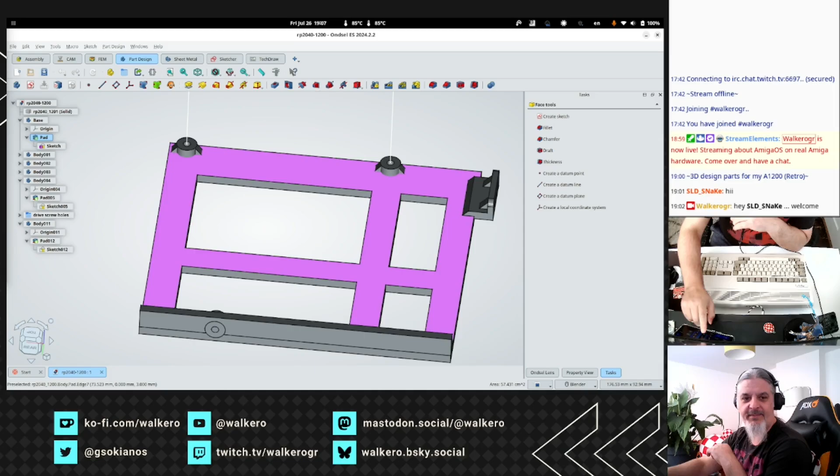It's Friday and today we are going to have a look at a few things. It's a quite different stream than the previous ones I did. We are not going to mess at all with PyStorm or things like that, but as you can see on your screen, I'm going to do a little bit of 3D stuff.

I'm going to explain what we are going to work on today. I don't know if you remember this, this is my old 1200 with the Blizzard 1230 in it, with a lot of stuff laying around inside the case, and we are going to work on a few things. So I will show you what the goal is and what I want to create today, and with your help and your company we will start doing stuff.

So before I start, how are you doing guys? How was your week? Everything good from your side?

So I'm going to open the case. It is already not screwed, and let's see what we have here.

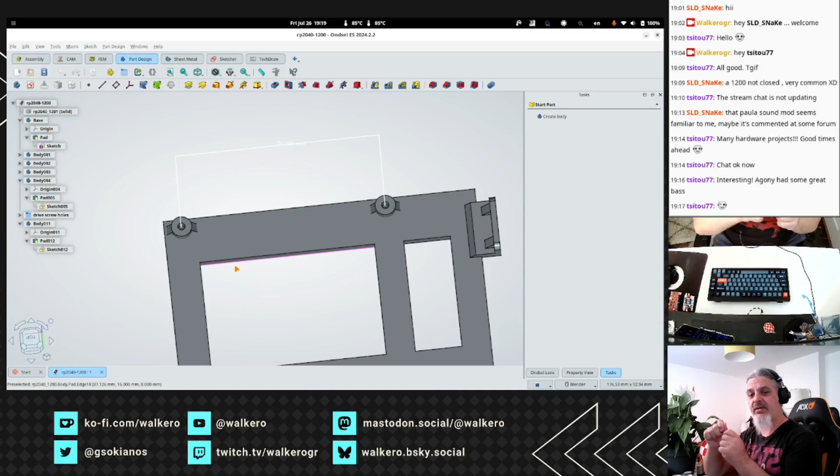This application is free of charge, and I'm using that. I started using it last week, so I'm not an expert. I started building something here, as you can see, which is a base. These holes here, I'm hoping, are going to align with the drive holes where you screw the drive onto the case at the back.

So I hope these are going to be there, and this is going to be in the place where you have the drive button, and that side is going to be closer to the Blizzard. So I hope to have here a hole that you can use with the extra stand that the drive has, and screw that stand onto the base.

So what I need to do here is create similar stands for putting down the RP2040, this SCSI board. It has only two places where you can put your two screws, but I don't think it needs any more. The idea is that this is going to be facing from this side, so from this side we are going to have the SD.

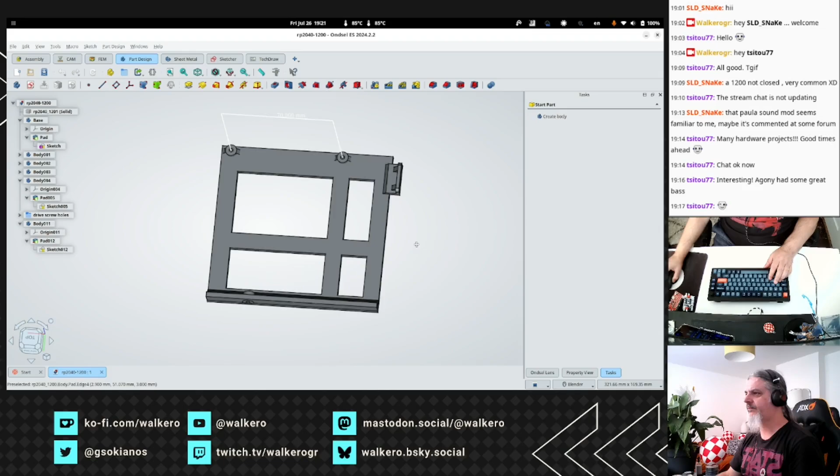I find that tool is based on FreeCAD and has a lot of options, but this version is more oriented to people who want to create models to 3D print. So I hope that's going to make my life easier.

What I did was find a similar base that is for Gotek. There are a lot of them out there, freely available. You can download and print them, and I have that here. Let me show that. So I used that as a model. The colors, I put this weird color so I can distinguish it from mine, and also see it when I need to find the exact position of the items.

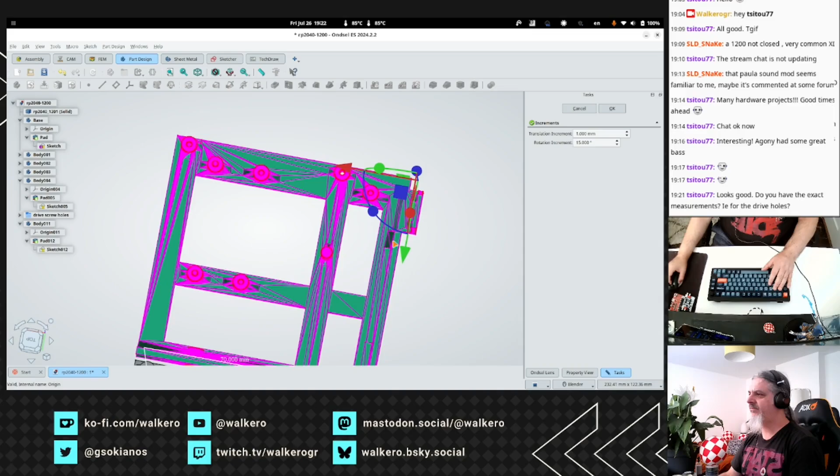So far I have put these holes here. You have seen what exactly I built, but that's the model that I found, so I need also to create this part over here, maybe. But first of all, I would like to start with this kind of stands and put them in the right place.

tsitou77: Looks good. Do you have the exact measurements, for example, for the drive holes? Actually, I haven't measured that, but I based it on this model, so I took the same positions that this model had. Here, let me clear that. I don't know how visible it is, but here you might see there is a measurement between these two holes, which says 70 millimeters. So this is something that I could measure.

Usually when you have to do things like that, you have to use one of these tools, which is a vernier caliper. This is quite useful because you are able to measure anything. The top side is for measuring like a hole. This side is for measuring between two edges, and it also has this extension at the end, which is usually to measure things like a tube and get the depth of a tube or something.

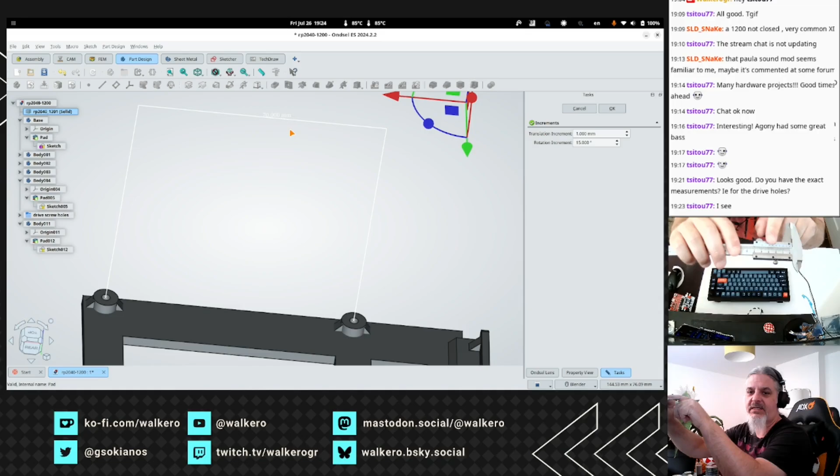So I have this one. It's not the one that I bought, it's one of the cheap ones. It has all the measures here and you have to understand where exactly it is. There are some others with a small LCD that are more accurate. We will see how it goes.

So one of the first things I would like to start with is, let's say that we have to put this on the base, and I would like to create these two holes. Now I don't believe and I don't expect that the first print I'm going to do is going to be 100% accurate, and I will not need to develop any other copy or make changes. I believe it's going to be a disaster, the first one, but it's going to be my first 3D printed item.

The other thing I'm thinking about is, since I'm going to design it, at some point to try to create it with cardboard and see, like a prototype, a fast prototype, and see how accurate it is or not. We will see.

The reason why I would like to do this is that a lot of times we need to make things for our Amigas and for our cases. So if I can make something useful, I think anyone is going to be able to do the same thing. So let's see.

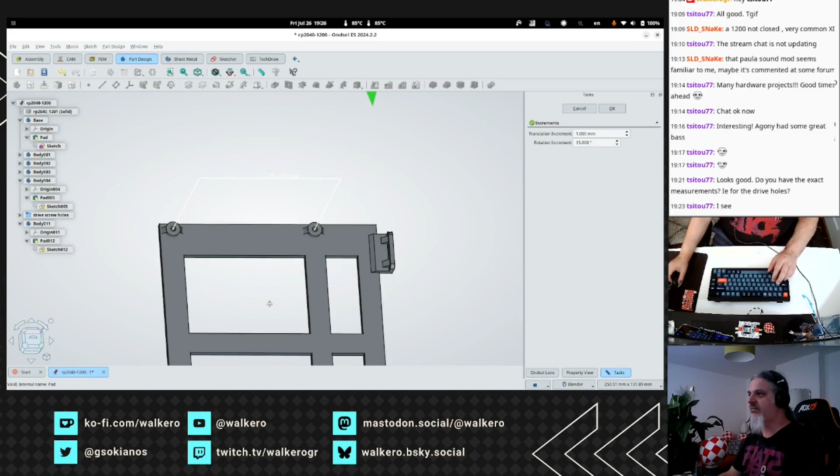If you have any question about the program or anything, please let me know. There are a lot of tutorials on YouTube about FreeCAD and this application, Ondsel, which is pretty much the same application, but it has different ways of setting up the environment.

What would be great is if we had a way to do these things on Amiga. We have 3D applications, right? So I believe this could be possible. The only thing we would need is a way to convert that model that you create, let's say on Lightwave or Cinema 4D or anything, to STL, which is one of the formats used with a 3D printer.

Would Blender be an option? Yeah, it is an option, and actually there are plugins, especially for Blender, for doing this kind of thing.

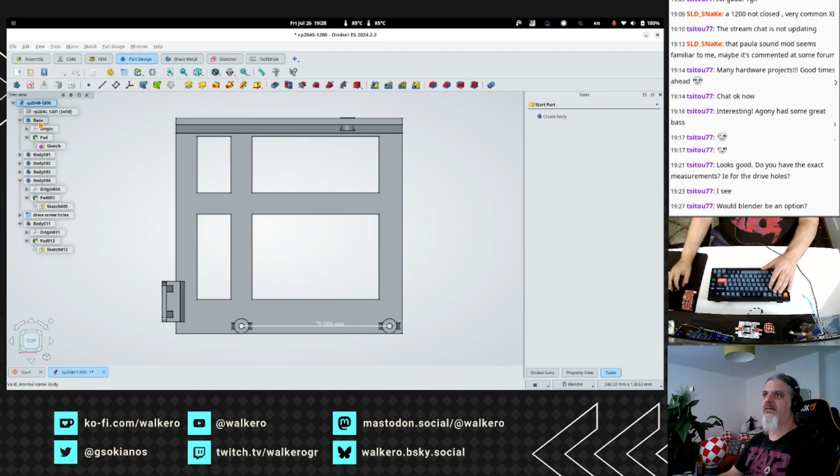For example, if I want to export, let's export here. These are all the different formats you can use, and the STL mesh is the one that is more used, let's say, as the format for this kind of file for 3D printing.

It can actually import STLs as well, and you can use them. The model I showed you earlier, this one here, was from an STL that I brought in, but I tried to recreate it, first to learn the application, and second to understand and make it as close to what I want as I can.

Chip says Blender would be okay, a different beast to master though. To create the model, I think it will be just fine. The problem with the OS4 version of Blender is that it is quite old, and I doubt there is a plugin to convert or export to STL.

Then you should take this model and import it on PC and create the STL there.

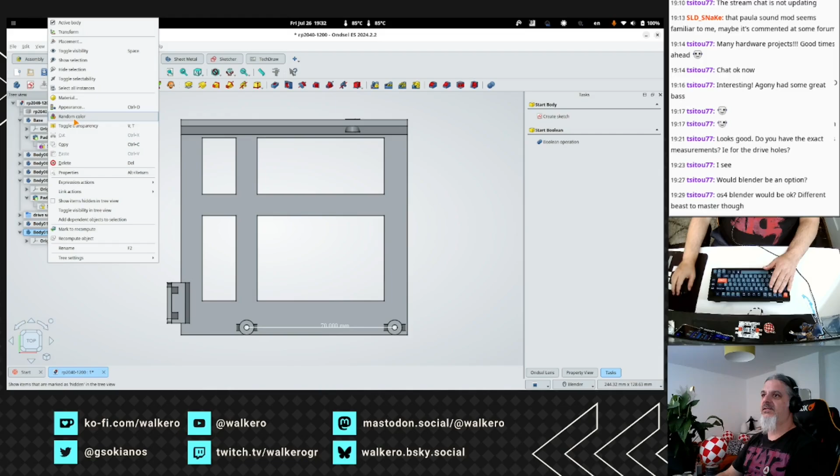What I need to create, I have the body for what I need, and I need a sketch here on this plane. You can select the plane you are going to sketch on, so I need the XY plane. Also keep in mind this application might crash, so it needs to be saved a lot of times. So we have the sketch.

Okay, and then we have to make it 3D, and since it's selected, you have to click on Pad, and that makes it 3D. Now...

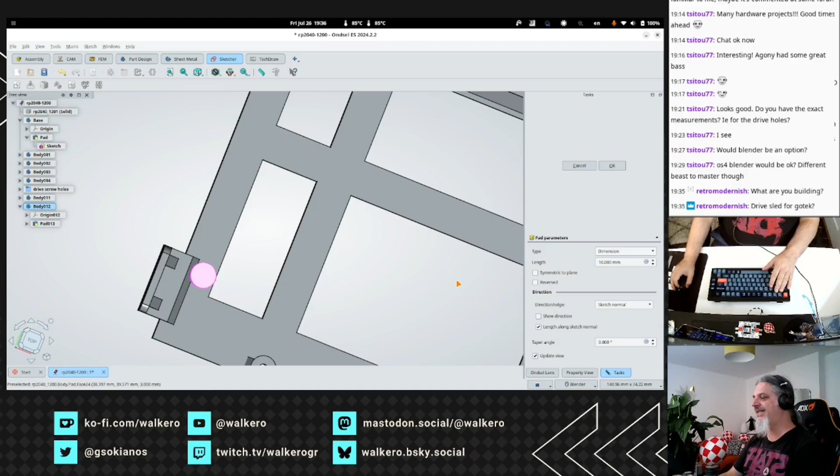What are you building, a drive sled for Gotek? It seems like for Gotek, but it's not actually for Gotek. I want to build a base to put in there, on top of that, this SCSI controller that I have for my 1200.

So the idea is from the outside, from the side of the drive, I would like to have the SD card, and that's what I'm building right now.

The program that I'm using is based on FreeCAD, it's a fork of FreeCAD, and it's completely free. I guess that's why it has that name. The fork is named Ondsel.

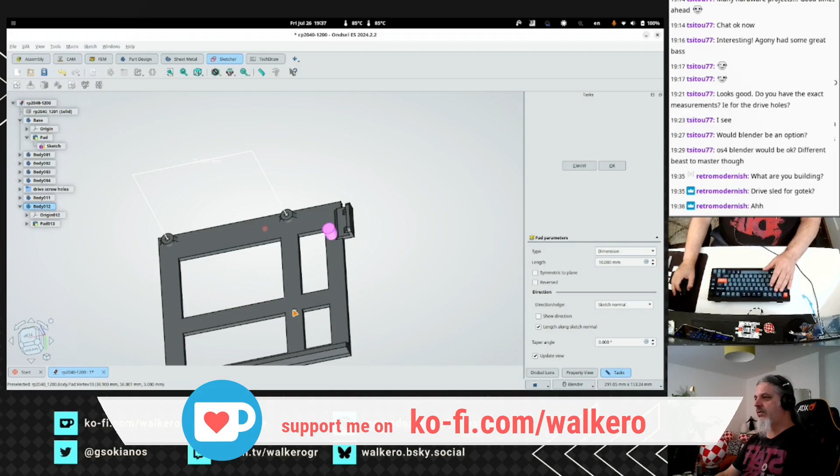It's a little bit different from FreeCAD in a way that it makes it easier for people that want to create models to 3D print. Not that you can't do the same things with FreeCAD, but the user interface is a little bit different.

I'm trying to understand it because I just started using it a couple of days ago. This stream is not a tutorial, I'm just doing my stuff live.

What do we have here? I have the body selected and I can create a sketch, I hope, on this plane, which means I can go here and create one more, which is going to be 2 millimeters.

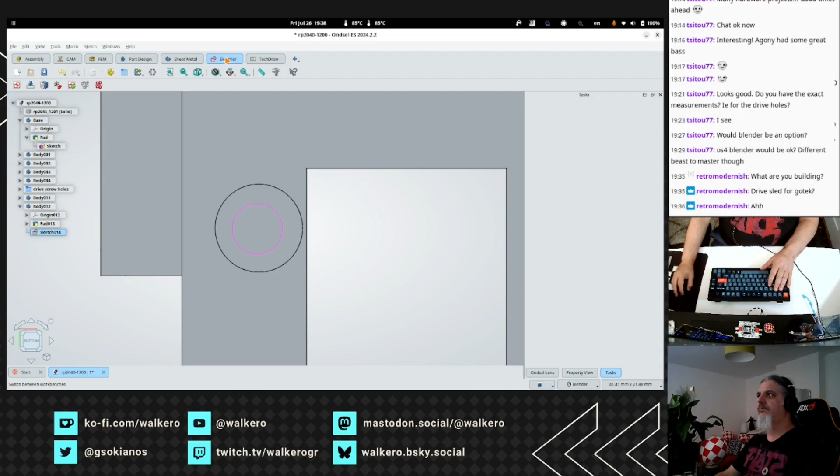Actually, there is a way to make the position accurate, 100% accurate, but I'm not quite sure how to do it well.

I think you have to use these constraints here. Say that this... yeah, I'm not sure how this can be done.

Okay, close. And I'm not sure I'm doing that correctly.

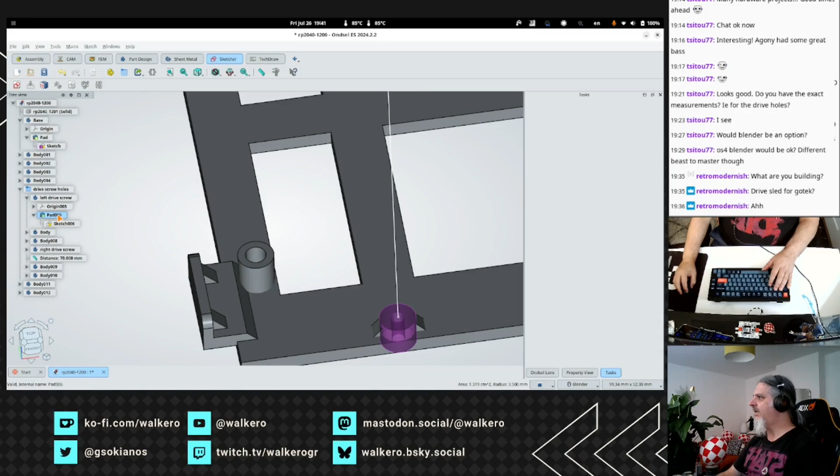So I have this one done. The trick now is to find exactly where I'm going to put it. This is a little bit, it has double of this, let me see, this is 6 millimeters. So this is 10, I think. The height is 10 millimeters, that's, I think, perfect.

But let me save it and check my model that I found online. Check this stand here.

Let me measure it. You have here the ruler, and that... should be 11.8. So let's say 12 millimeters.

The reason why I take this measurement is this is for a Gotek, so I guess it should be measured for the board of the Gotek to be at the same height as the entrance of the floppies.

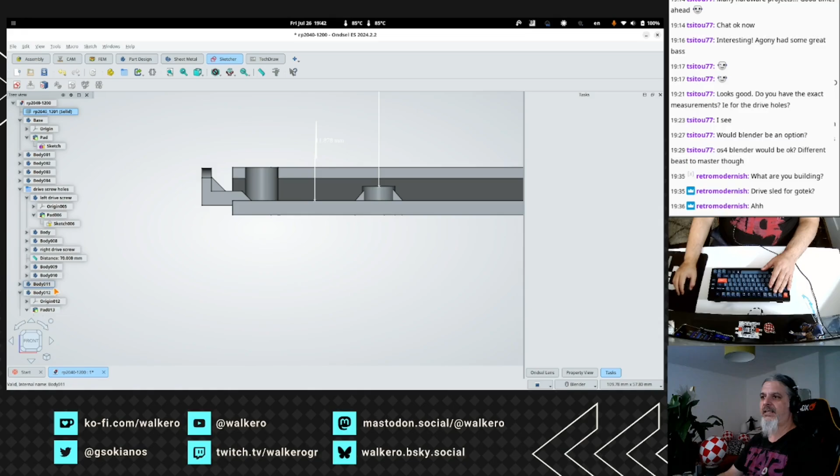So let me hide that, let me delete this one, and I will make this 12 millimeters.

Now the other tricky thing is where exactly should I have it. For sure not at this position that it is right now.

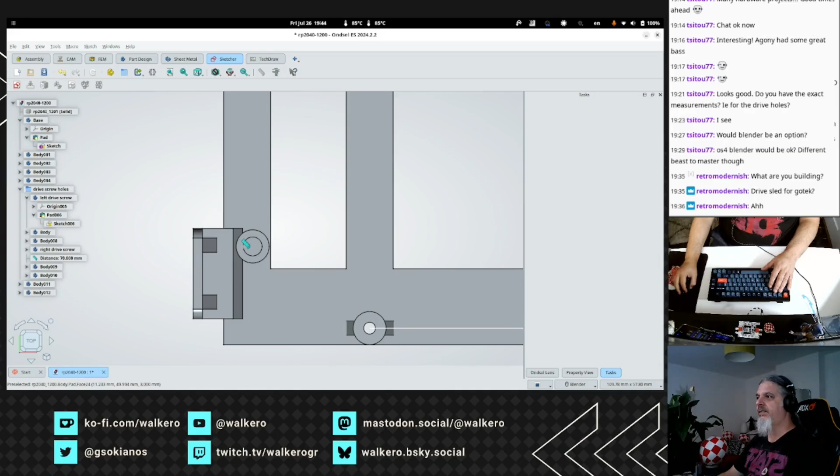Let me see, can I have from here to here, and let me move it.

Okay, so if this is 8 millimeters, I hope that this will be less.

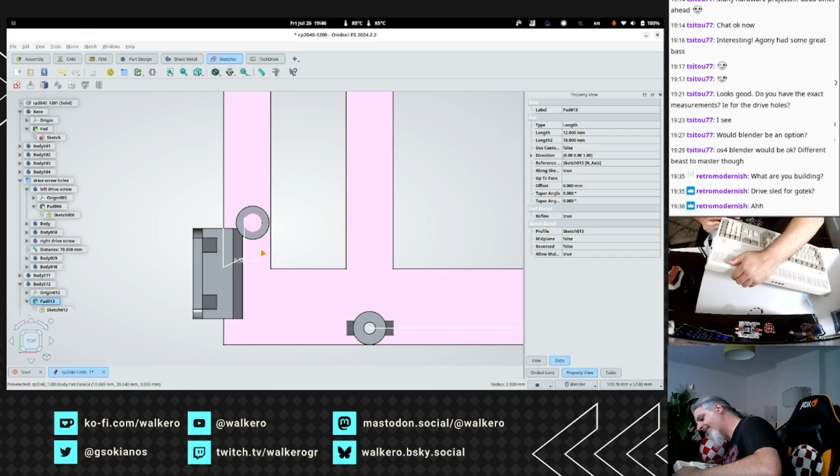I measure that, let's see. If I bring my Amiga here... yeah, that is right. Okay.

I see that the gap for the floppy button is around that position.

So what I will do is take this item and move it like that.

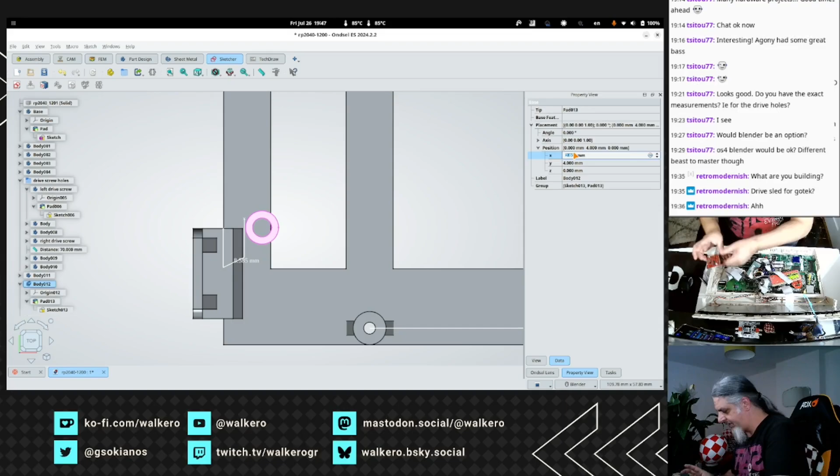How far is this going to be? So I hope that this part is going to be, let's see, from here to here, how far it is. It should be 3.7.

3.7. Let's measure it from here. Here, how much is it? 32.

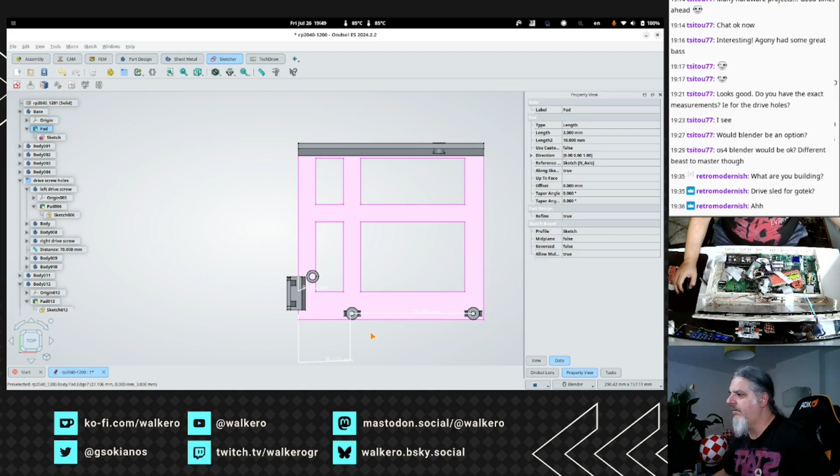Sorry, it's not that accurate. Let's say from this to this. 30. Okay, more or less.

So that side is not touching the end of the case, and that might make sense because the case at the top side has this curve over here. I don't know if you can see it, which needs to be avoided.

So yeah, okay, so that means there are 5 millimeters of space.

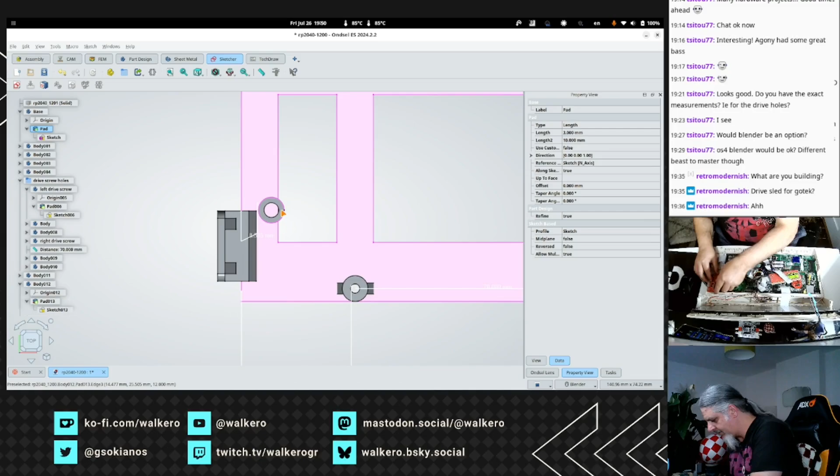Okay, so if we say that the space is 5 millimeters over here, let's say, where should I put that so that it can be externally accessible?

Okay. Since this is set, this is 3 millimeters, so, 3 millimeters.

Needs a few more millimeters to go outside. Should the SD go outside the floppy space? Would that be wise? Maybe not that much.

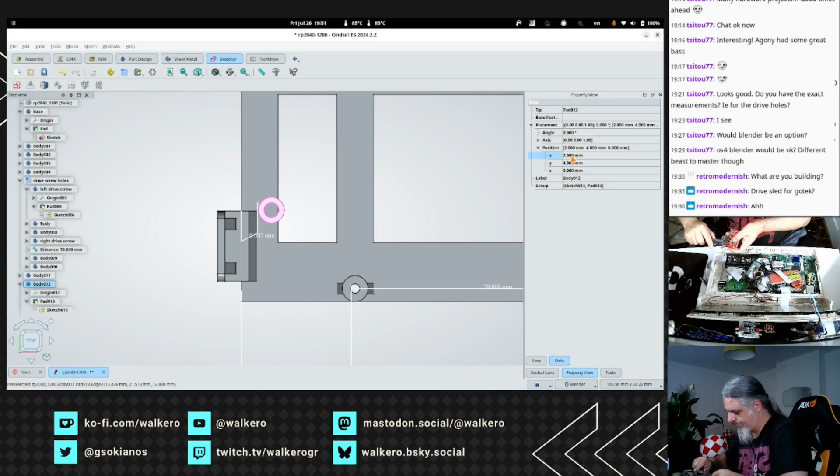What I am thinking is... now this card has the SD over here. It has the SD, and it's possible just to push it inside, and then it gets more outside. It has more space so that you can grab it and remove it. So the SD to the board is around 3 millimeters, and the board to the start of the hole here is 3 more millimeters.

So what I'm thinking is that if there is a space of 5 millimeters between the case and the base here, and if I have 6 millimeters here, that means that this board is going to be outside, this SD is going to be outside the floppy space. So what I would like to do is give it some space more, 3 more millimeters. So I'm going to have this edge at 4 millimeters from the edge.

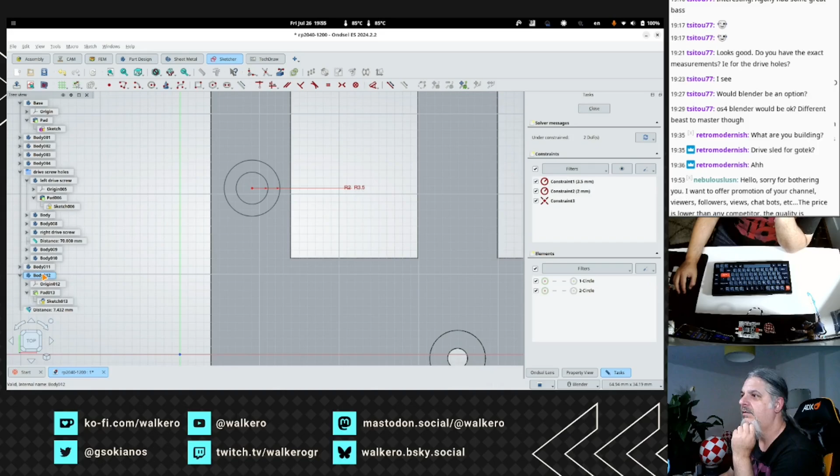So this is actually 7 millimeters. That's not possible. Because that hole should be 10 millimeters. So if this hole is 2 millimeters, this cannot be 7 millimeters. Right? So I think something else is present.

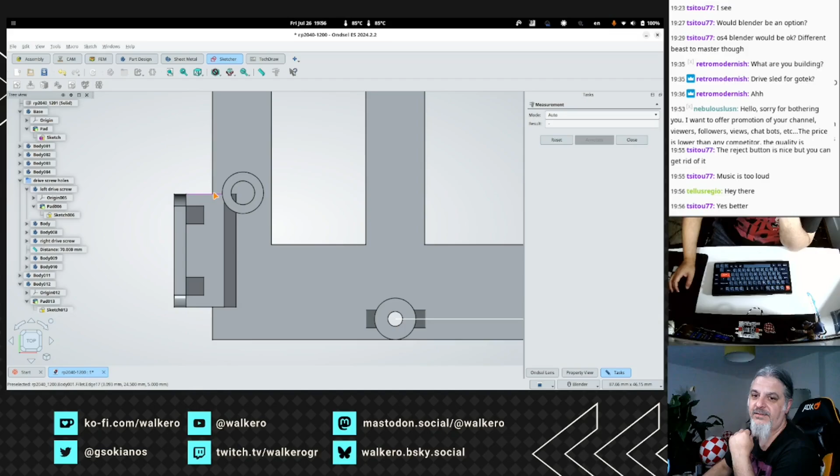Great. So let me see how can this be used. Distance, angle, length, okay.

No. I don't get what exactly that measures.

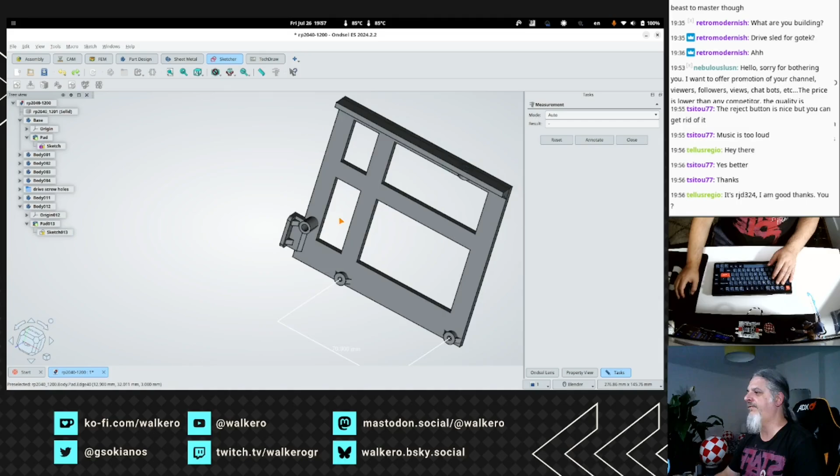I'm doing fine. I'm trying to do my first 3D model ever for my 1200 and I can assure you that it's not a piece of cake. I'm trying to understand how to use this tool. This is based on FreeCAD and is one of the best tools to use out there, I think, or that's what I'm told.

I think that hole is too big. Okay, it crashed. Nice. And I probably did something stupid here and that's why it crashed. As long as the OBS is not crashing, that's better.

Ryan, what I'm trying to do is create a base for this card, and for this card to be placed inside the 1200.

Ryan says it's good to know that it is not just Amiga that crashes. No, absolutely not. Amiga, it is pretty logical that sometimes it crashes. These things should never crash. These are, let's say, professional tools, and they should never crash.

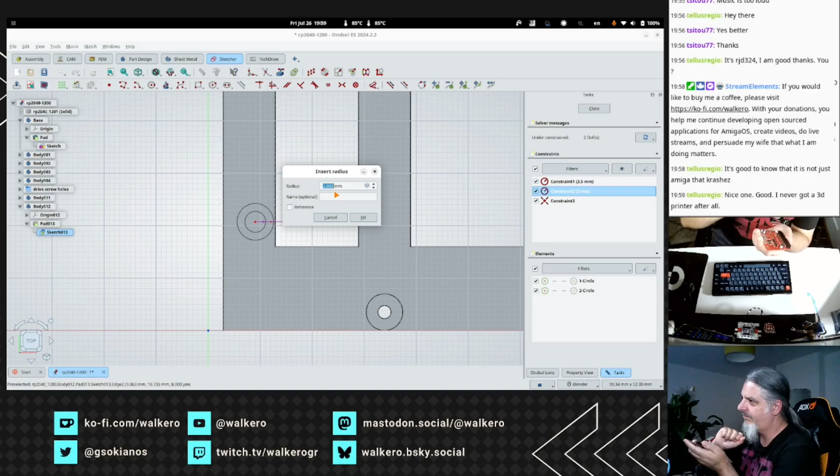Should I make the outside bigger? Actually, you have to make it a little bit smaller because the screw should be able to make the path in there. Should I make it 1.8? I don't think that it will harm anyone. Let's keep it that way.

Ryan says, nice one, good. I never got a 3D printer after all.

Me neither. The plan is to make the model that I want and then send it to some kind of websites, companies here in Ireland or somewhere else, and have them 3D print it for me.

Javier says, welcome Javier. Javier says, and what the fuck is that? A 3D printing? Yeah.

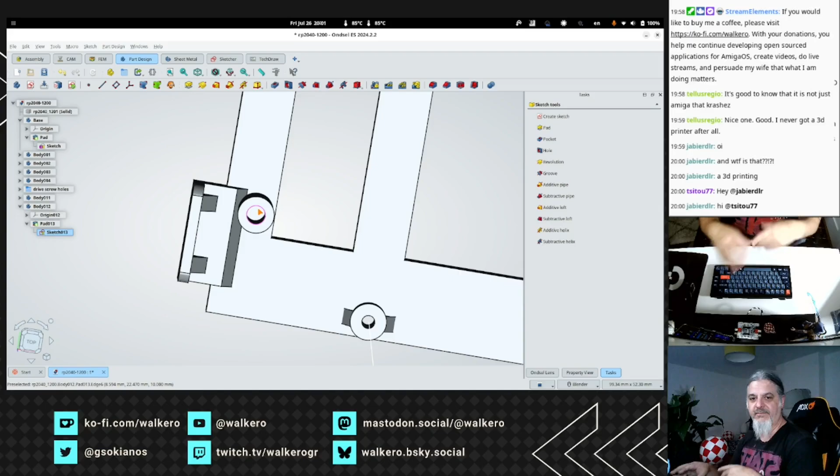Today the stream is completely different but related to the Amiga, because I'm trying to create a base for my Amiga parts, and this is going to go inside the 1200. So, because this 1200 is going to get a lot of things fixed in there, since parts are floating inside the case, I want to create a few bases that will be useful to make things more stable.

Now I'm trying to understand how to measure things, and one of the things that I saw earlier is that the center of this should be around the end or the start of this fake button here.

So let me move it up. And now the thing is that I want from this side to be 4 millimeters further. So let's see, if I go here, it's -3, or here is -2. Okay.

-2.5, 6 and 7. Okay, let's do it. 3.8. No, 0.3. No. Okay.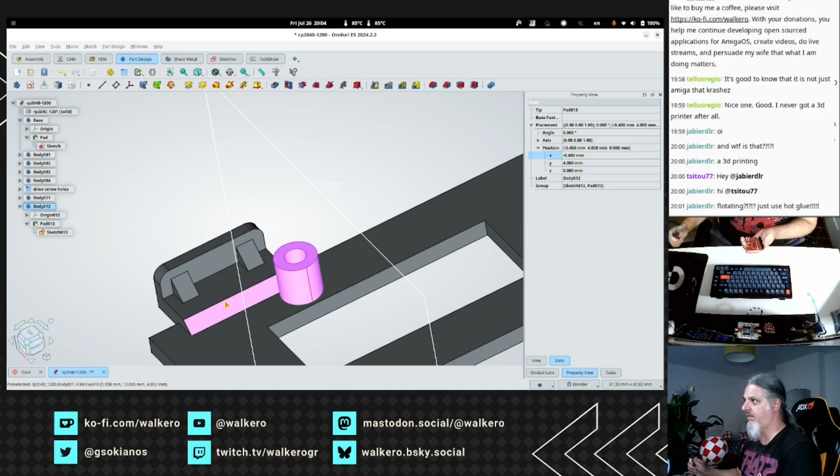Okay, so can I copy that, everything from it, and paste it. Paste. Okay, that's the one.

And now I have to move it over here. Okay, let me... no, actually we have that here in property view. Y64 should be there. I hope.

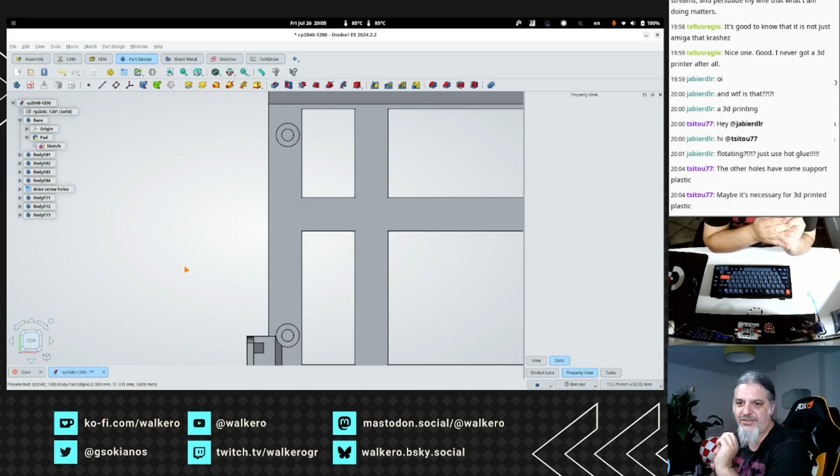Javier says just use hot glue for floating. Yeah, you're right, hot glue is the best thing to use. But this board I'd like to have some extra features. I need it placed in parallel with the floppy drive space, where the floppies go. I removed the floppy drive, so I have to put it there and be able to access the SD card. That's my weird feature I'd like to have.

Hey Amiga, welcome to the stream.

FreeCAD, yes exactly. So I need this to be accessible from outside, and I don't want to use an extender.

Tsitou says the other holes have some support plastic, maybe necessary for 3D printed plastic. Actually it's not necessary, I put them there just to make it more solid, because it's going to be screwed from outside the case. Maybe it is necessary, maybe not. It just makes this hole more stable, and keep in mind this is smaller in height. Not so much smaller, because this hole is also open from underneath, so what I expect is the screw is going to go from this side up, and it's stable enough.

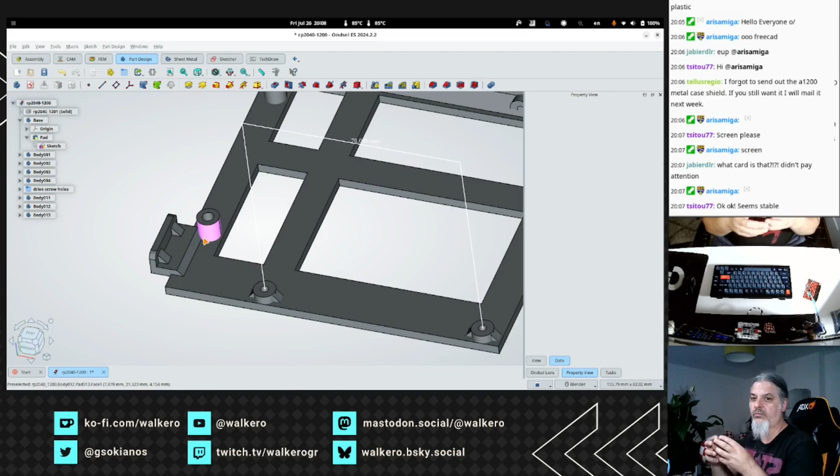What card is that? Didn't pay attention. Yeah, this is the RP2040, a SCSI to SD card. This camera never focuses. Yeah, SCSI Compact RP2040. From this side you have SCSI, from here you have the SD card, and it works like a hard disk.

I use it on my 1230 Blizzard, which has the SCSI card, and it's great because it gives you much more speed. I like it because when you have high CPU usage, you don't lose too much hard disk speed, because this SCSI card has DMA. What I measured is without high CPU usage it's around 8 megabytes per second. With high CPU usage, it gets around 7.57 megabytes per second. You can't do that with the internal IDE, no matter what you use, even a FastATA card. Yeah, I've measured that.

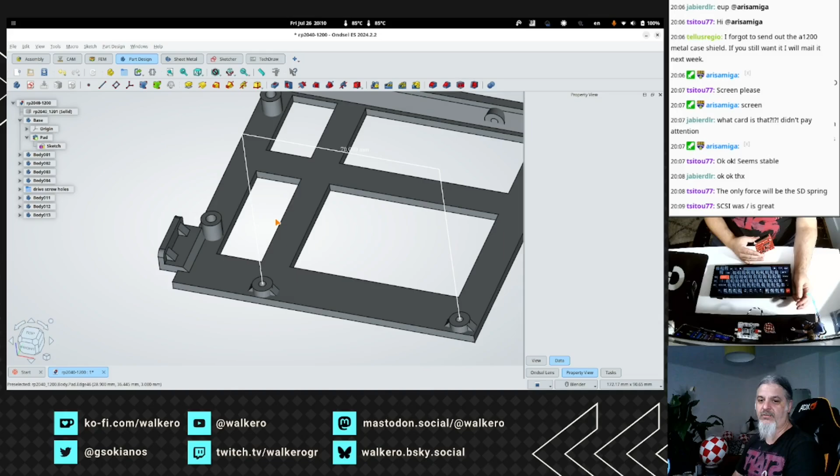tsitou77 says SCSI was and is great. Yes it is, I think. I can't understand why I never used SCSI before. Maybe because this kind of card wasn't available until recently. I think this card, which is pretty small, was released one or two years ago, and that makes it easier to use in cases like the 1200.

So if these are right, which I doubt I'm going to get right the first time developing things like that. Okay.

So the backside. Maybe I should take photos of the actual item and be able to import the photos here, put them over the model and see if that works well. That might be useful. I have to figure out how to import images here, make them the correct size, and put them over the model.

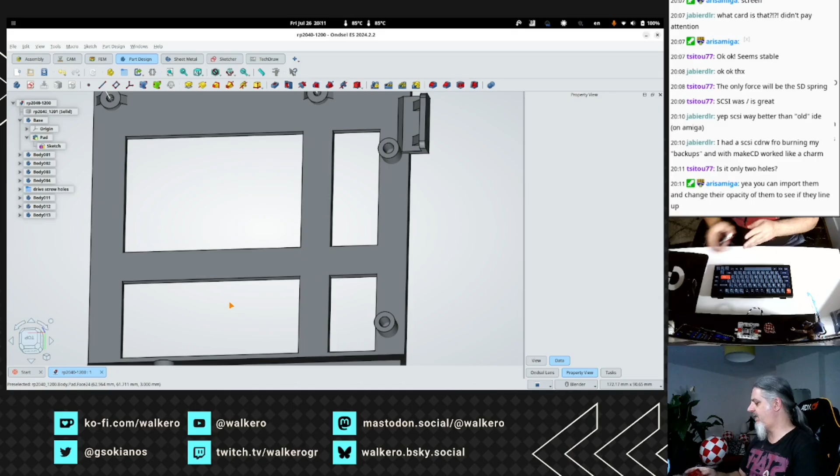That's an idea. So if these are here, the cable should go over here. How far away? Let me see. So it's 5.4 centimeters from the end of the screw. Let's say you want to leave some space for the cable connector, let's say 6 centimeters, I think that's going to be fine.

Okay, the connector is 1.5, 1.6 centimeters, so you need more. Let's say 2 centimeters of space, and 5.4, 7.4, 7.5 centimeters of space from this side. Let me see if that can be used.

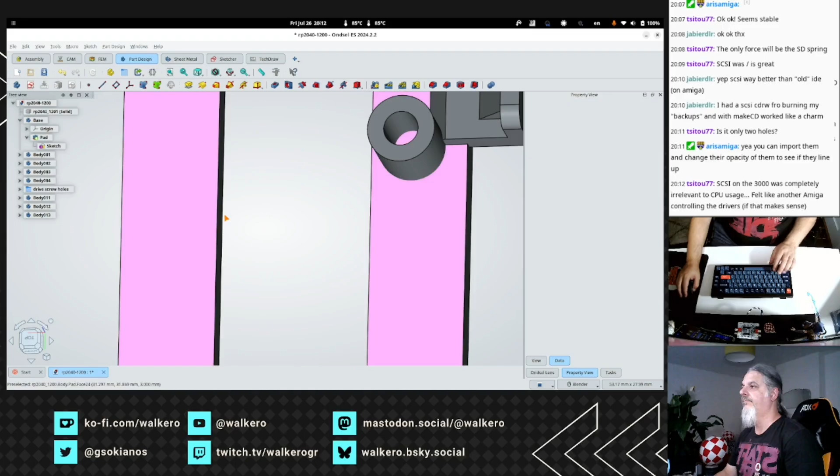Javier says SCSI is way better than old IDE on Amiga. I had the SCSI CD rewriter for burning my backups, and with MakeCD it worked like a charm. Yeah, exactly, never ruining any CD-ROM.

Is it only 2 holes? Yes, it is only 2 holes. It doesn't have any other.

Arisamiga says, yeah, you can import them and change the opacity to see if they line up. That will be a great option. The other great option will be to create this model, let's say, somehow on a cardboard and take measurements there as well.

SCSI on the 3000 was completely irrelevant to CPU usage. Felt like another Amiga controlling the drivers, if that makes sense. Yeah, absolutely.

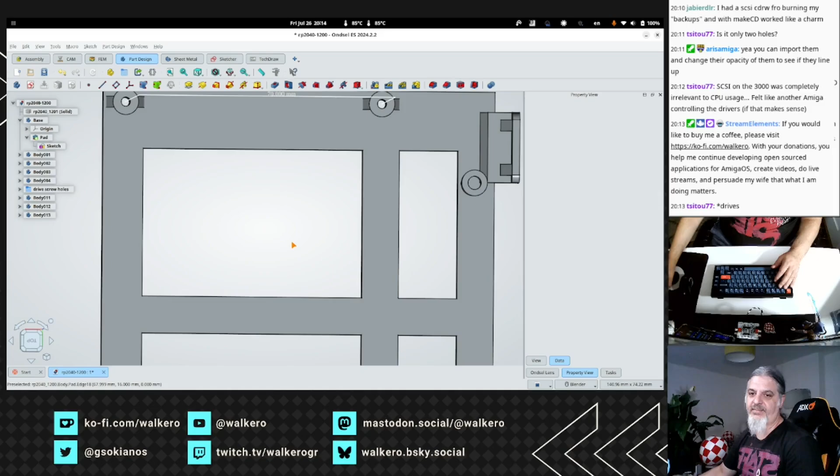That's why I remember back in the day, those who wanted to do music editing or video editing preferred to use SCSI drives instead of IDE. The only reason I believe the SCSI drives were abandoned is the cost of them and the cost of the controllers, unfortunately.

So let me see, how can I measure something from here, let's say, to here. Can I do that? Okay, 89, and we said 75 we want. Okay, 89.

Great, so I have that here. Can I change that? 75. No, I can't change that. Okay.

So what I need to do is, where is it? Like that. So the reason why I measured that is to know exactly where the other card needs to go, the BassMX.

So if we leave 75, we need to create here some area to put this card. This card is 4.9 from one side and 6.4 from the other.

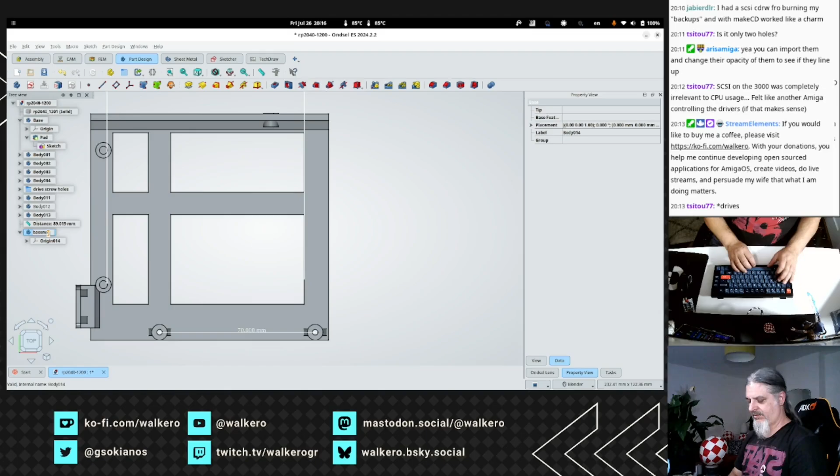And let's have a sketch of it on this plane. That's going to be like that. We said that the long side is 64, the small side is 49. So the long, let's do it like that, and close. Okay.

I'm thinking either to put it horizontally, because also in this computer I have the subway, and if that fits there, I would like to have that as well. It will need some longer cables though.

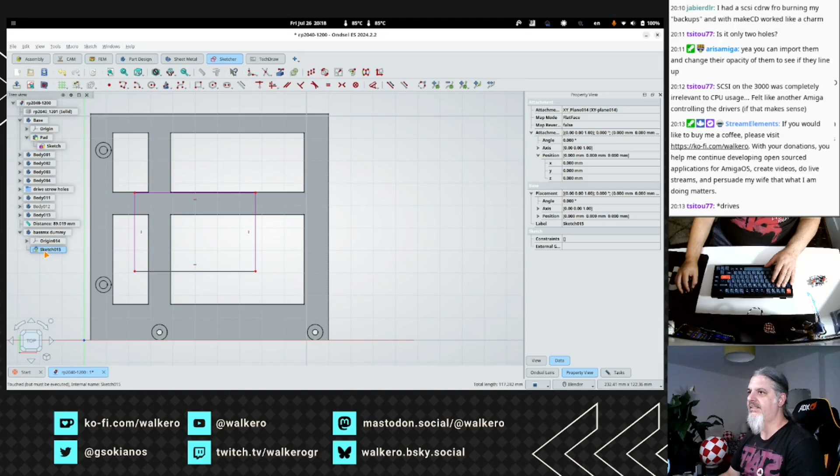Let me see, how can I change the size of this sketch. Okay, delete it. Let's create it again. I'm still learning, so please bear with me.

I don't think that the subway is going to fit, so let's go with this one.

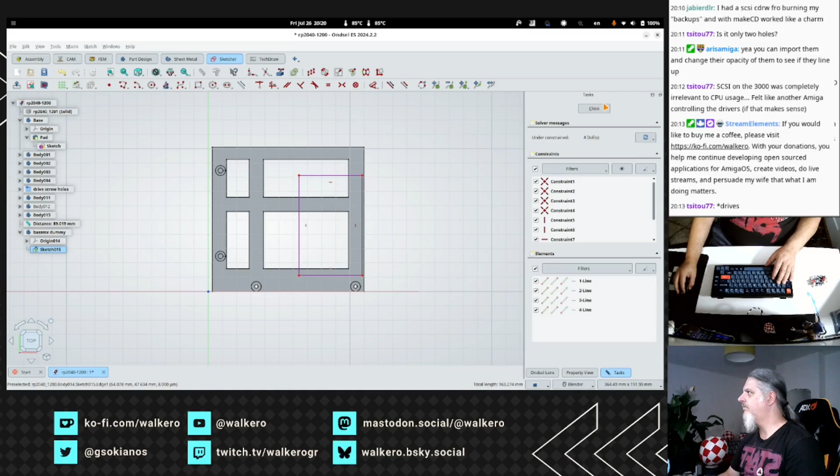Okay. Can I change now its size? Can I? How about here?

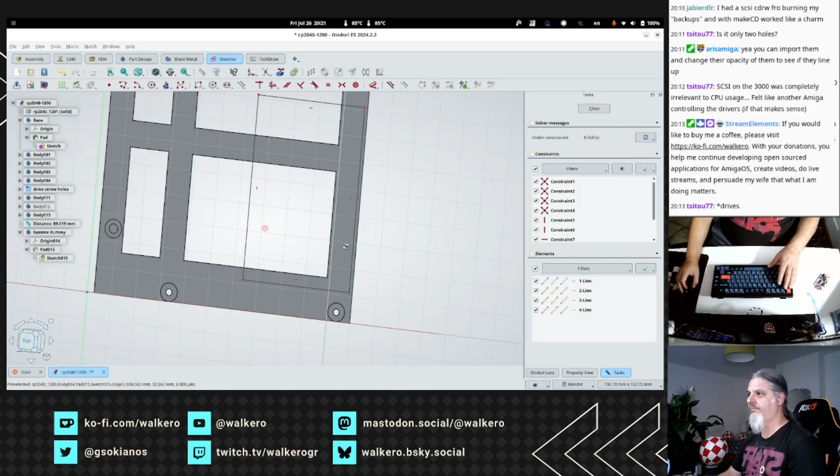This is a dummy, it's not going to be over there, just to take some measurements, I guess. So can I get from here to there?

52 and we need 74. Okay, so this needs to be moved. Placement, position. No.

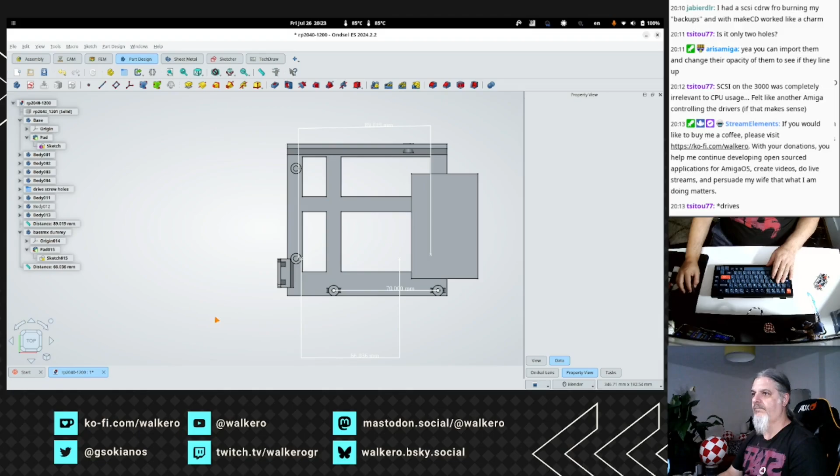Yeah. 76. Okay, so we need this to be around here. Okay.

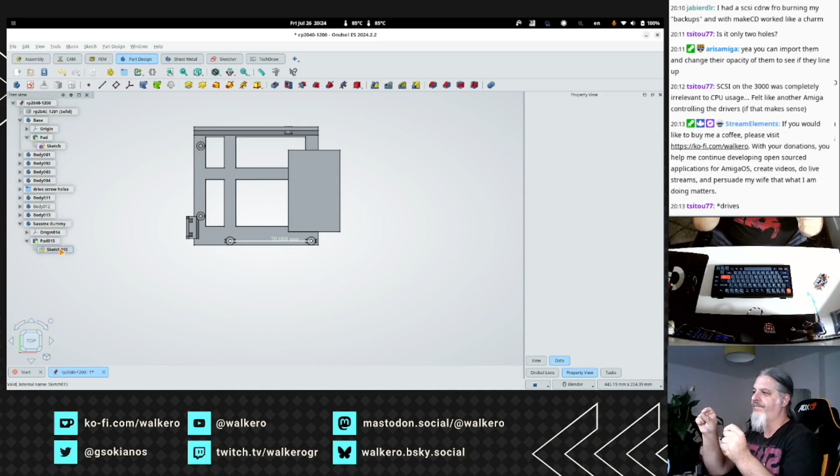And we don't need this one. Actually, there should be a way to measure 2 points, I guess, and even if you move the items, these measurements should follow the items. I don't know how this can be done, but let's say that this is the item we want.

This is the BassMX, and yeah, I need to fix again its size. Let me see. Position. No, nothing here.

You see, if I go to, let's say, one of the circles, the holes that we created, if I double click on them and go to the constraint, I can change the value here, but I would like to do the same here.

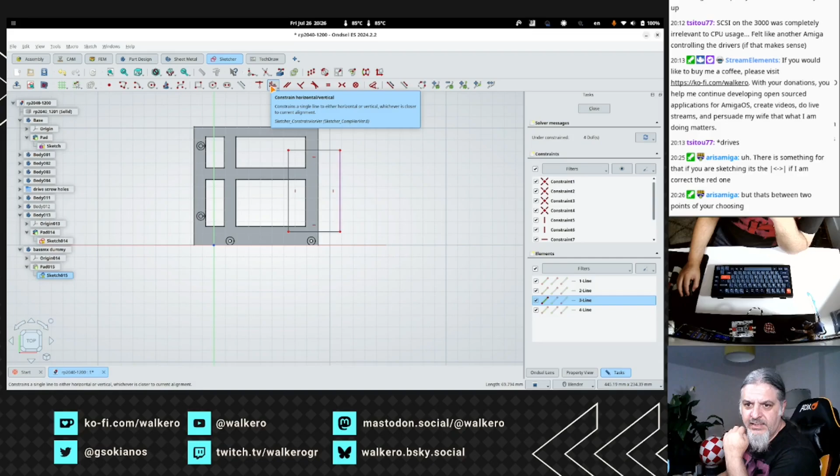So if I go there and click on that, is there a constraint that says the size, constraint horizontal and vertical? There is something for that. If you are sketching, it's the parallel, if I am correct, the red one, but that's between 2 points of your choosing.

Yes, this one, I think that is a constraint that 2 lines are parallel, or this one for equal. You can say that this line and this line, these 2 lines are going to be parallel and always equal. Now, toggle driving reference constraint, activate, deactivate constraint. Okay, it's not what we need.

Constrain horizontal vertical constrains a single line to either horizontal or vertical. No. Constrain block the selected edge from moving. That's not what I want. Alignment, geometry, offset geometry. Polar transform, array transform.

There should be one called constraint distance. Constraints. Constraint distance. Yes, there is one. And that's right. So this needs to be 64. Thanks, Arisamiga.

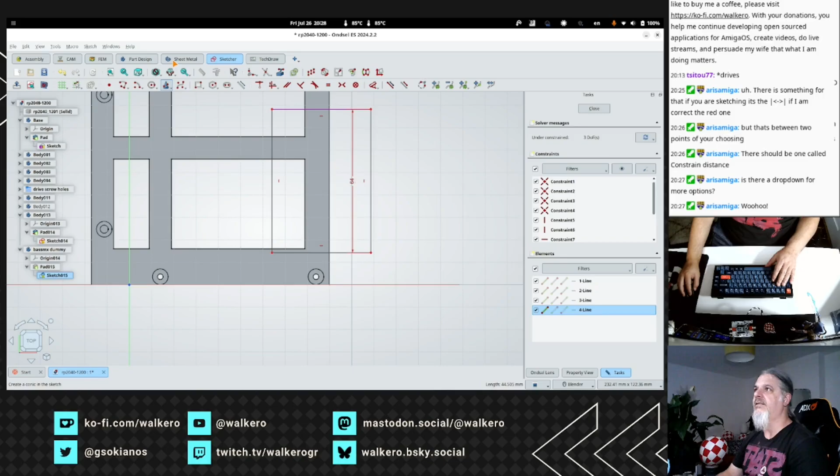Constraints. Constraint distance. That was 49. Okay, and actually this should be here as well. Great, thank you so much, Amiga. We found it. So, since we have the block, the dummy one, let me push it a little bit higher.

So this should be this z-axis, yes. Okay, I will put it much higher. For this, we don't care how high or low it's going to go. The only thing that we should care

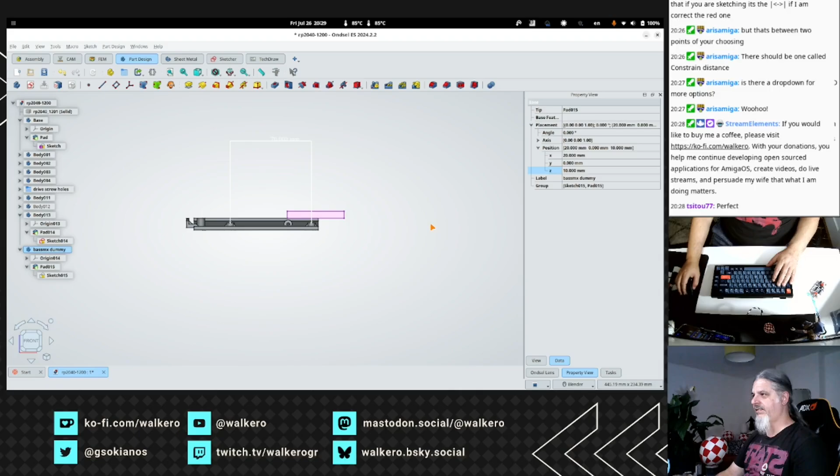is to have space, because okay, I'm going to remove these headers, the RCA, and I'm going to remove also the connection for the power. All these are going to go with cables wherever they need to go. So all the connections, I hope, are going to be done from above, so we don't care about

anything that is going to be from the left or right. But there are some really small holes over here, and we should use some of them to screw that onto the base that I'm creating here. So I would like to create these dummy holes on this item, and these are really small. They are 2 millimeters.

Okay. So if we go to the sketch and we go to here, we can create a 2 millimeter hole. Got this one.

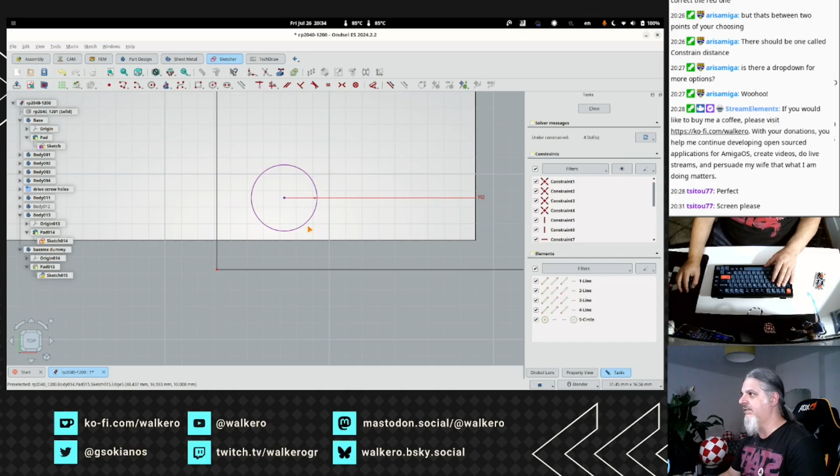And 1.5 is the space between here and here. Let's go in there. So this one is 2 millimeters. Okay. And sketch constraints. Lock constraint tracks. Okay, that should be this one.

Vertical distance. Select exactly one line or up to 2 points from the sketch. Okay. So if I select this and this, and then I do vertical distance, no. If I select this line, and do vertical distance, constraint vertical distance, 1.5. Why? Cannot set the datum because the sketch contains conflicting constraints.

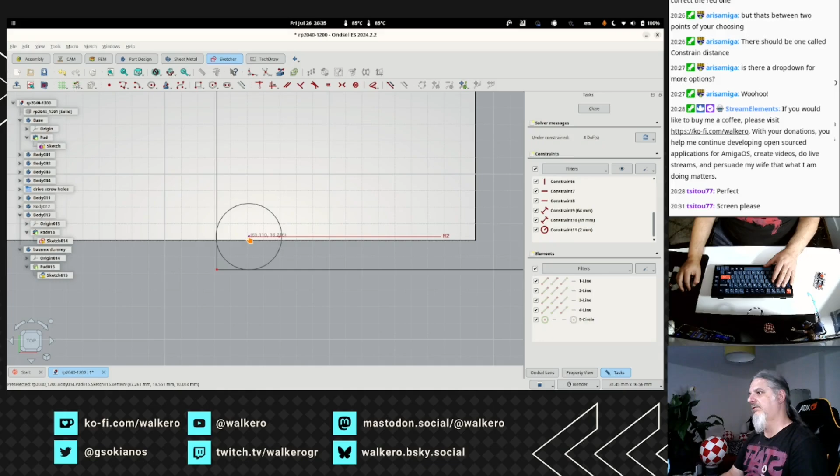Okay, so some kind of constraint is conflicting. Which one? So if I was doing this and assign, let's say, 5.

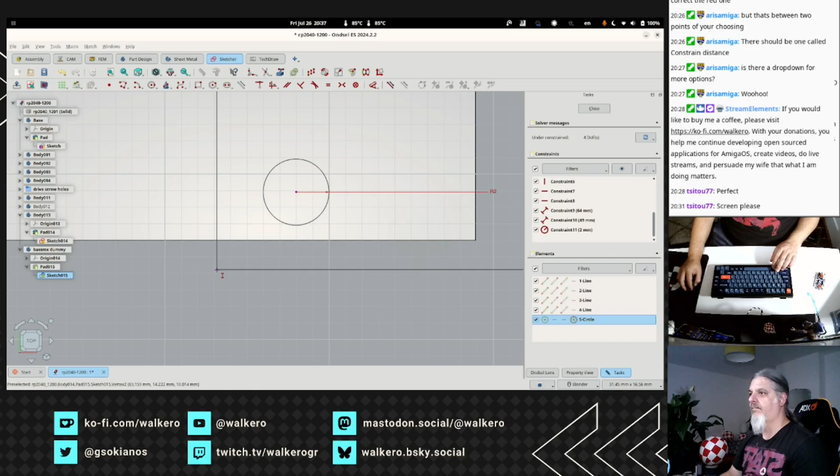Okay, 1.5. Okay, now I got it. Because that constraint is not the size of the hole. Okay. So it should be like that, should be one like that. So if I go and do this,

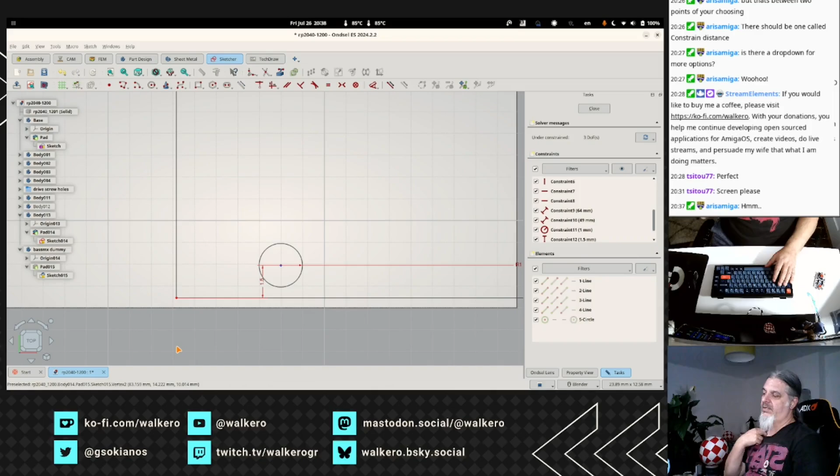if I select this one and this point, okay, 1.5 millimeters. Okay, and this should be done with that as well.

That I designed might be completely wrong. What I mean by that, here I calculated that this should be 1.8. But actually 1.8 is from the center to the end of the circle, so it should be 0.9 or 1 millimeter, and this that is 3.5 should be actually 1.7, something like that, or let's say 2 millimeters, to make it a little bigger.

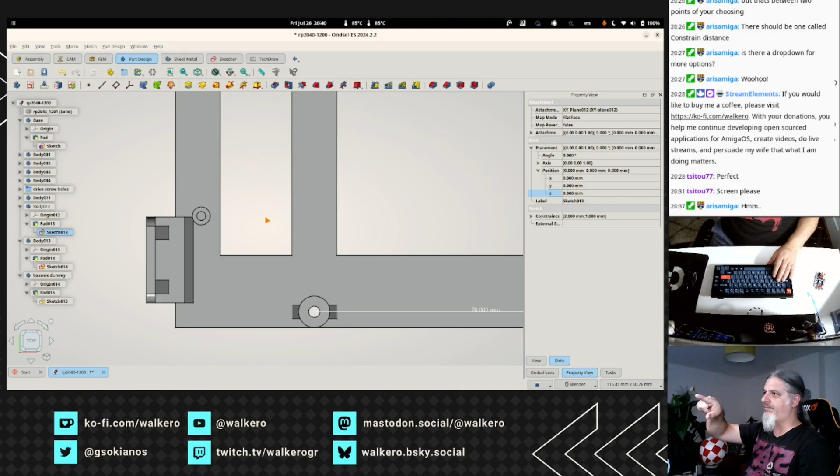That's how this should be, and the same is for the other one. So close. Okay, and because the position is exactly the same from the center, it might be right or wrong, like I wanted. Maybe it is wrong, because I calculated that for being in a different position. So I wanted that to be for this one 4 millimeters from this side. Okay, this needs to be recalculated, I guess.

Let me though finish this one, this part. It's not that easy. I thought that doing this kind of models would be much easier, but they are not, especially if you don't know the program that you are using, like me.

Okay, can I have a constraint here of 1.5? No. So if I want to put a constraint, I have here 1.5 for this. Is that right? Because I have to measure from the center of the circle, and this is not right.

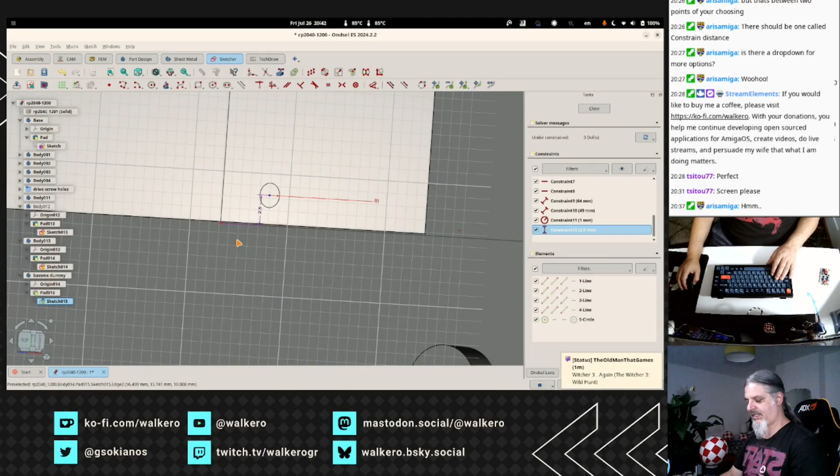This should be, since this is 1 millimeter, that should be 2.5. 2.5. Okay, and I want the same from the side of it, from here. So I need

I'm experimenting right now and see if that is doable somehow. Okay, so what I need is from this and this. Here at the side you can select other things as well. So can I make it? No. This, can I do it like that? Nope.

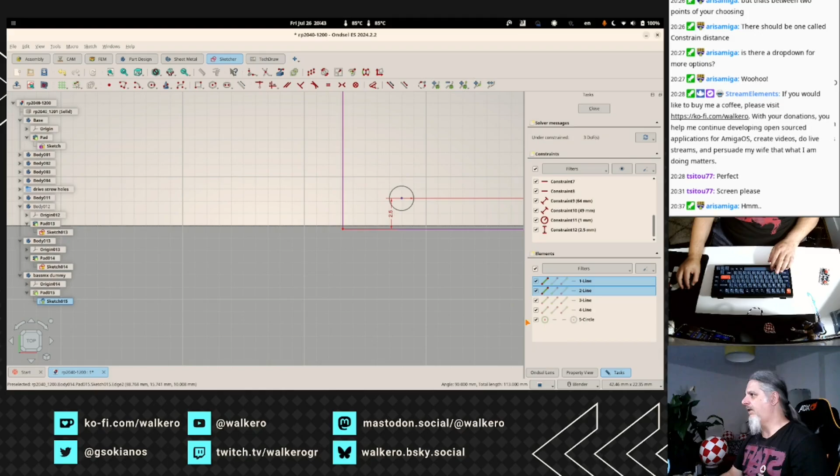Okay, that's from the center and that's what. This line, that's the second line, okay. And this one, select exactly one line or up to 2 points from the sketch. Okay. One from the sketch, 1.5, oh sorry, 2.5. No. Oh.

This actually can be deactivated if I want to. And say, okay, move it here, but I want to have this over this, sorry, this over this.

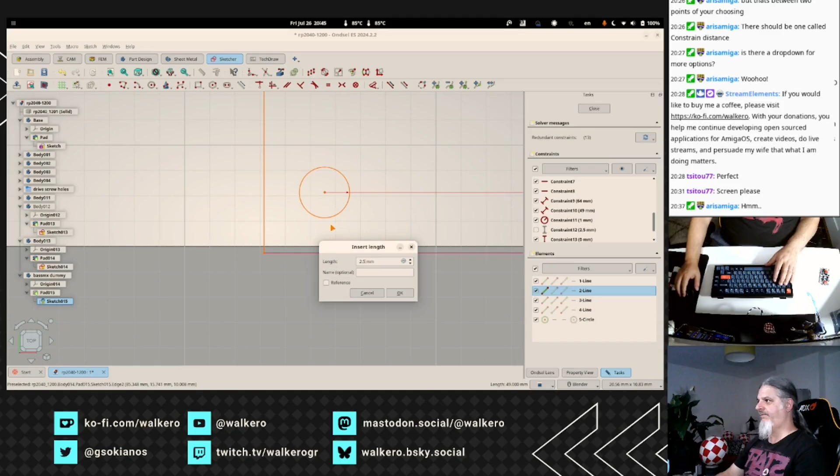Okay, if I select that point over there, it connects it with the bottom line, which is not what I want to do. So if I select this line and do a constraint, 2.5... yeah, that's not it. Okay, if I select this and do a constraint, nothing, to this, can I do it? 64, no, that's not what I want to do. Okay.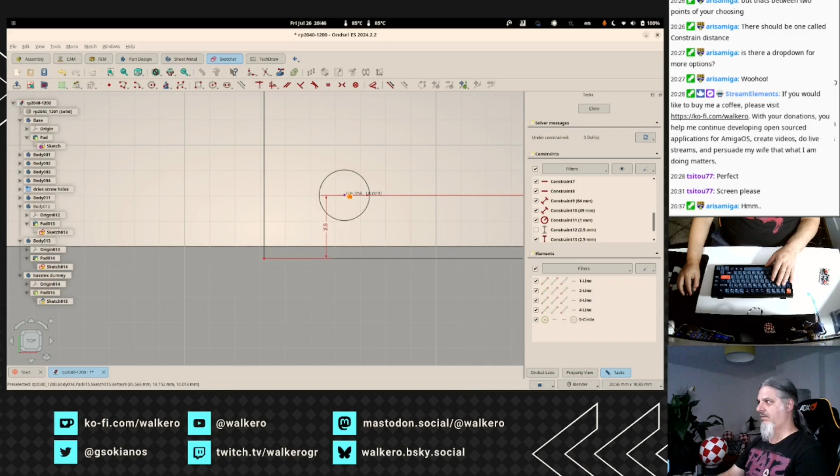Okay, if I select this one and this, 2.5, so by moving that, it moves also the item. Okay, because I have the constraints. Okay, so this can be deleted.

Now what I want to do is have one constraint from the other side, but it doesn't seem to be able to do it, or I'm doing something completely wrong. It tries to put a constraint to this line over here, but I don't want to do that. Escape. I select this one and do that. This is the constraint for this length. If I select...

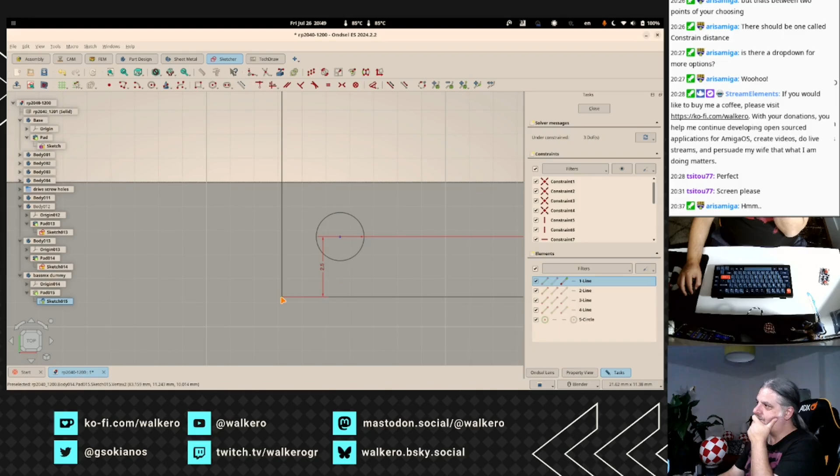Okay, so here it tries to do it with the top corner. So if it is 2.5, okay.

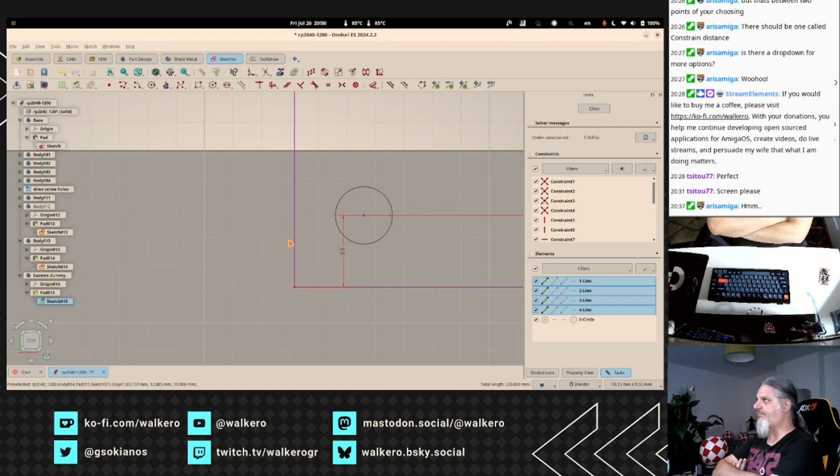This is a headache, so I need to learn more about that. Okay, let's leave it for now. Until I manage to understand how this can be done, let's just go here and take this, close, okay.

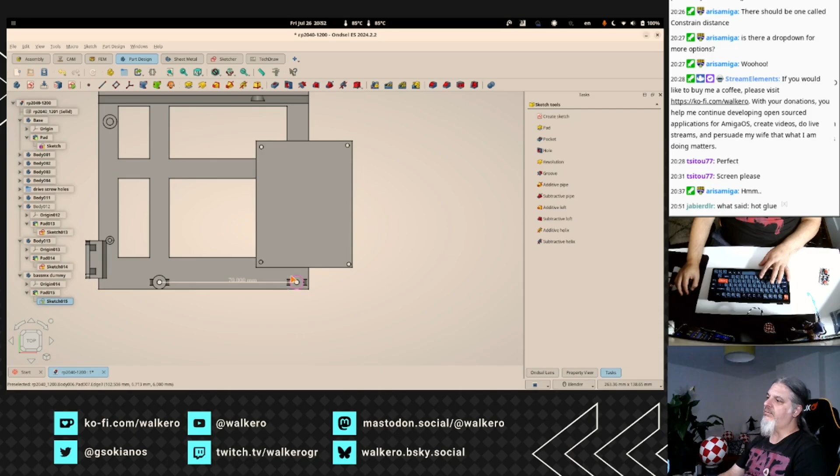So that's after all a dummy one, and I will need to revisit it. And I don't want to be so close here, so I'm going to move it a little bit further up. Okay. Here. But to have that somewhere being standing...

I need to fill up these holes over here. So let me, okay, and let's go to the base and the sketch over here and make these parts smaller, as well as this one.

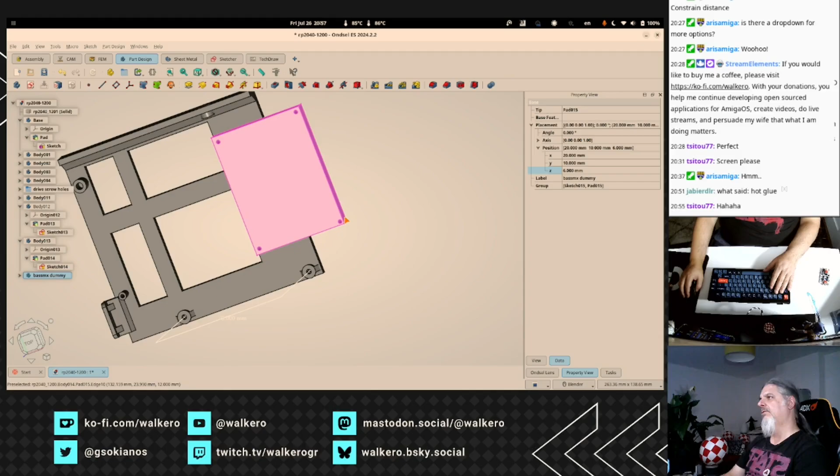I think I will need to put some more constraints here and there so that everything is aligning correctly. Now, should I make it bigger from this side, since this board is going to be further out? This board needs to go somewhere like that. And probably I need to extend the base so that these sides can have somewhere to be screwed, I guess. So let me save in the base. We need to get bigger.

But before I do that, let me set this so that I can't ruin it. Not that I won't do that.

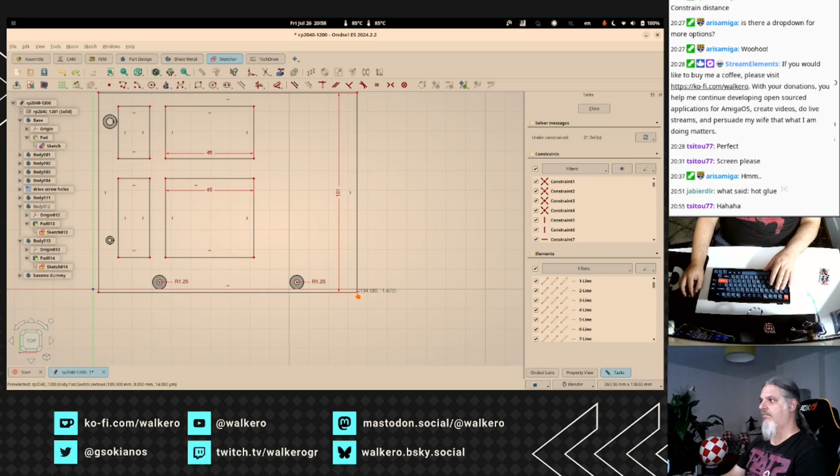That's why you need to set all the constraints, because right now if I move it, you see that the size remains the same at the top. The vertical size remains the same no matter where I move it, but the other items are not in the right place, so it will be useful for them to be constrained with the corners and all the stuff.

jabierdlr says, what said? Hot glue. Yeah, you're right. But I thought to do a proper work. That's the problem with this stuff. Yeah, let's see how it goes. I'm interested to see the outcome.

Yeah, as I said, it just needs to understand better the constraints, understand better how I can set the sizes. I know that these holes here are correct because I created them based on the STL that I found on the internet and the model, and that should be correct. The one that I have here, that's the one.

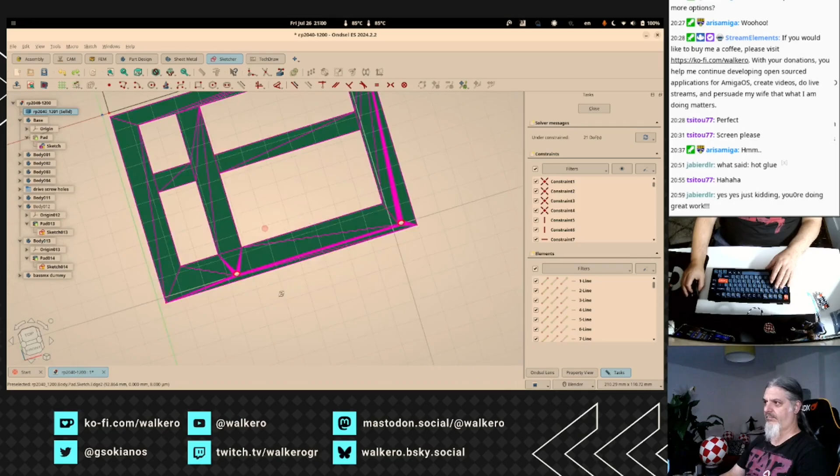But I also want to create my own stuff, you know. So what I need to do is create these holes correctly and in the right place. I need to bring images of these boards instead of having these dummy items, or make these dummy items even better if possible, more accurate, and have a look how they are going to fit on this case.

And I also need to understand how I can use the measure distance to measure the distances. That is going to be also useful, although if you play with the constraints you are going to have a better result, I think. So I will say, let me have a look on that, watch a few tutorials and get myself more prepared for the next stream. Play more and get better knowledge on how this program works.

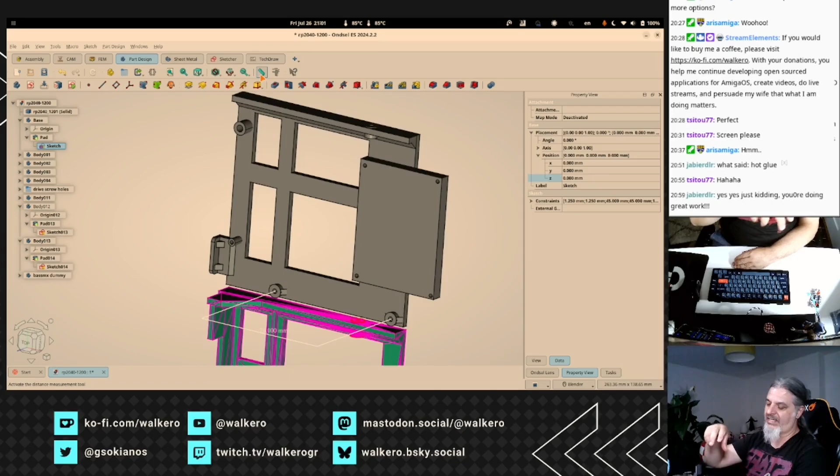It is going to be a little bit higher, and above the chip I would like to put a small fan that pushes a lot of cold air if possible, but also have a stand, something like here, having on that cradle a way to keep the Prisma more stable.

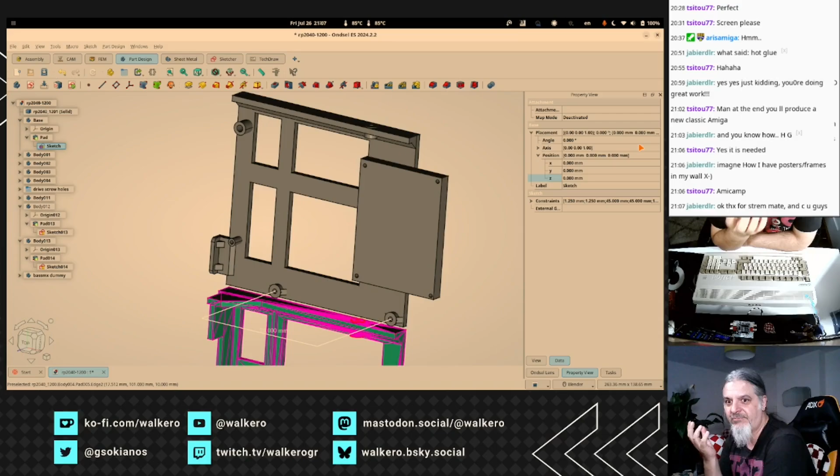Yeah, that's it for today guys. I'm going to work a little bit offline on that, and actually learn the program a little bit more. I'm not an expert, but I like to create as much as possible and experiment with new stuff that I haven't done so far. Off-camera modeling, yes, exactly.

I think that is useful to be shared here in my stream, because others might get a boost from my side to create your own stuff. If I manage to make it happen and work, I'll probably share the models with others if they are working as they should and aren't so bad. And of course, have it printed and set up inside the Amiga. That will be a great stream.